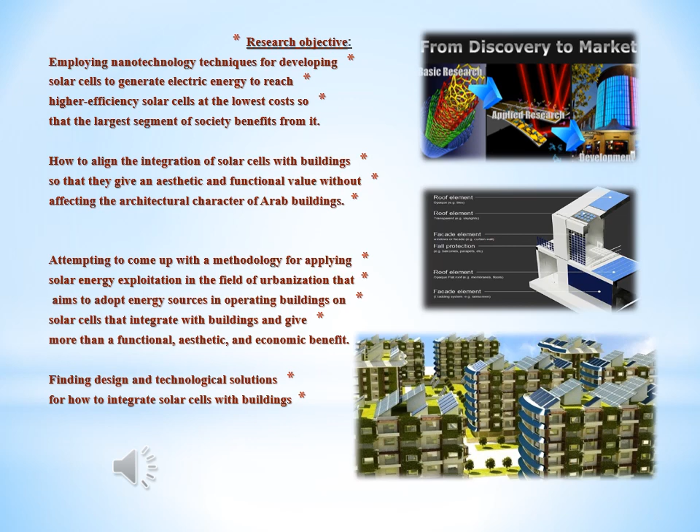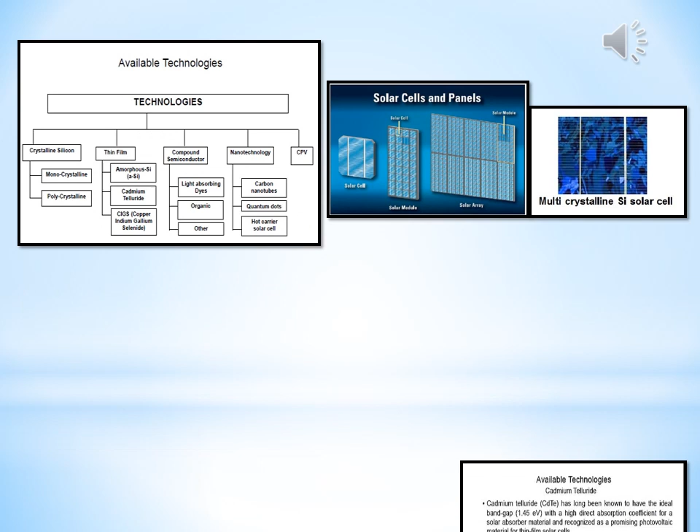This slide shows the different available technologies of photovoltaic cells: crystalline silicon, monocrystalline silicon, polycrystalline silicon, thin film, amorphous silicon, cadmium telluride, copper indium gallium compound semiconductor, light absorbing or organic photovoltaic, and nanotechnology CPV.

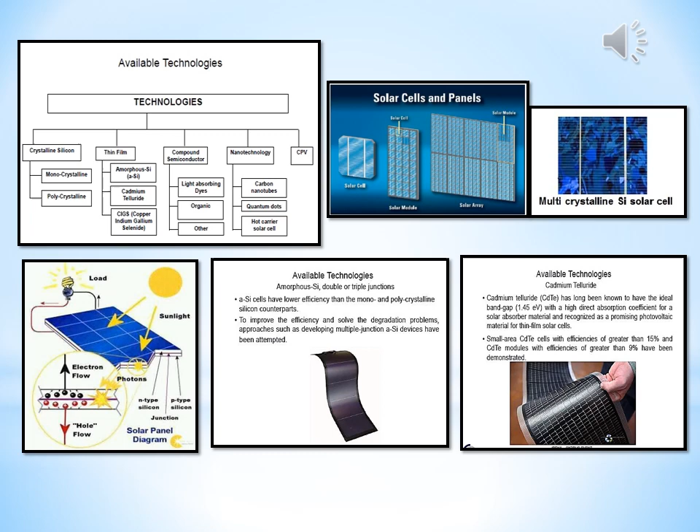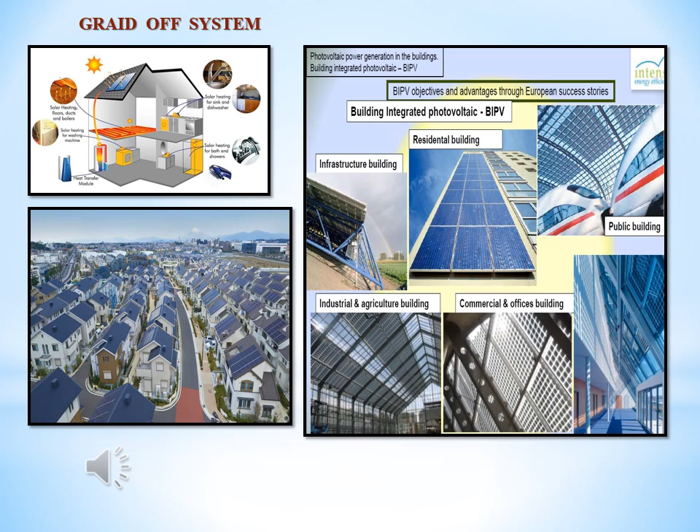This slide shows the grid off system of integrated photovoltaic cells. Photovoltaic power generation in building integrated photovoltaic, BIPV: residential building, infrastructure building, industrial agriculture building, commercial and office building, and public building.

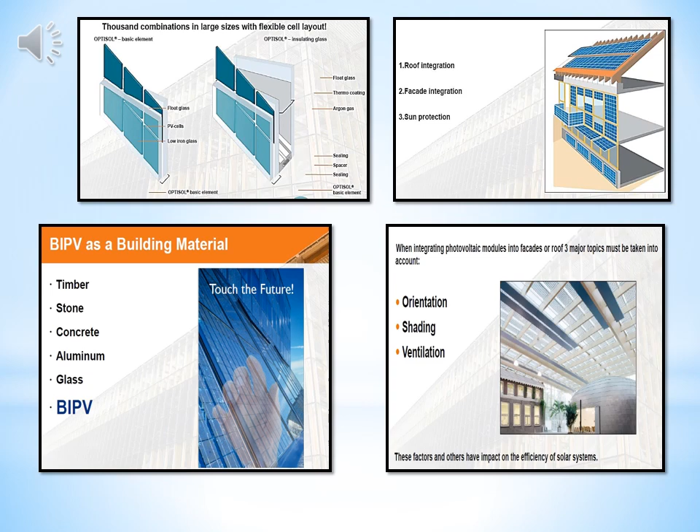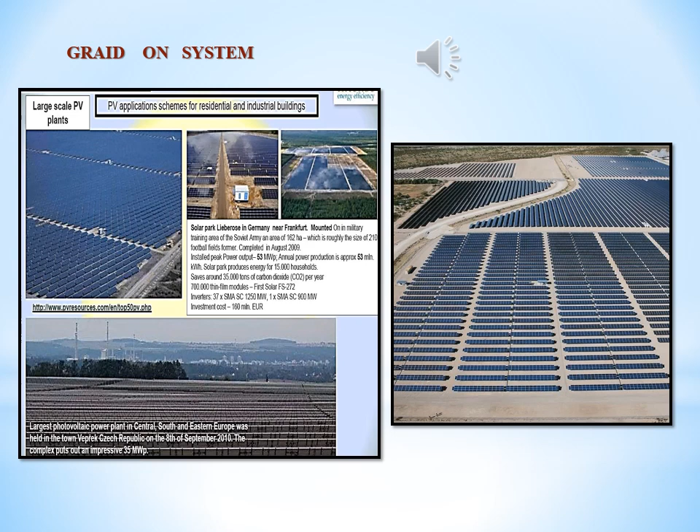This slide shows how architecture design can integrate photovoltaic cells with buildings. This process of designing the integrated energy of the building must include the following activities beside the traditional architecture design and construction stage.

Integrated design of the building through content and cooperation planned by the building and owner design, with a clear goal setting for the building design and project costs.

Simulating the building energy performance through an electronic system to help the designer take better decisions about the properties and components of the building's outer shell.

Learning about the efficiency of using solar energy technology in the building gives option and opportunity for the designer to design an energy efficiency strategy for the building, understanding the general climate of the project site to help design the climate environment of the building to be responsive to the general climate, helping to realize energy consumption reduction in the building.

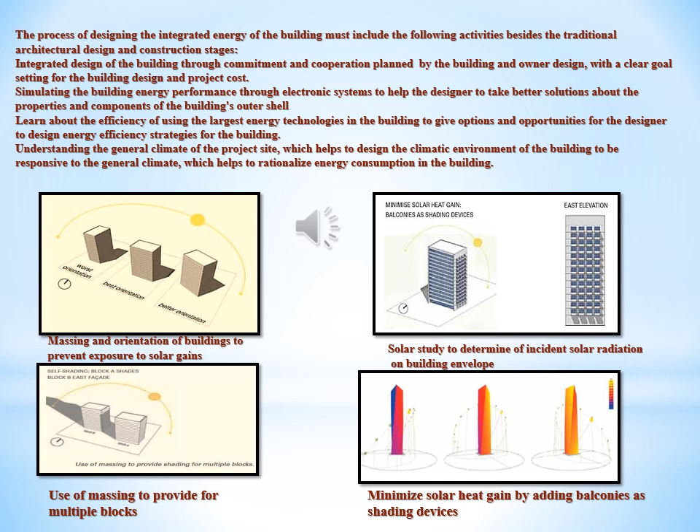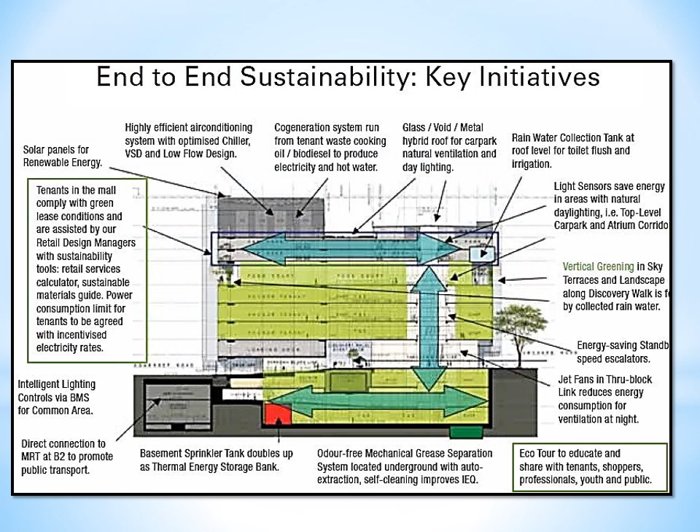Case study: building orientation is optimized with minimal direct west facing facade, 15% to reduce solar heat gain. Computational fluid dynamic analysis is carried out to optimize natural wind flow through the development. Sun shading devices are provided on the northwest to southwest facing openings. Approximately 60% of the roof area is covered with a combination of PV panels and an extensive green roof system.

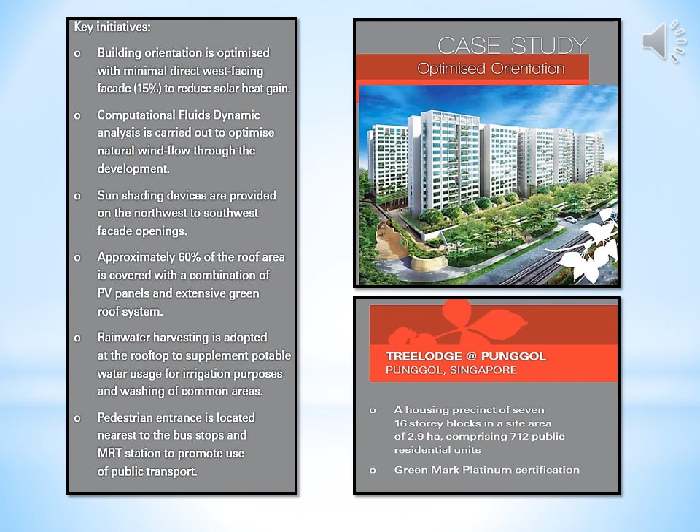High performance building envelope designed with a host of environmentally friendly features, including high energy efficiency cooling plant, innovative heat pipe technology to reduce the cooling load of the air conditioning system, and recycling of condensate to save water, thereby reducing the carbon footprint of the building. Energy efficient fluorescent lights with electronic ballasts are installed in the building, and motion sensors connected to the lighting in the toilets are used to reduce consumption.

The GATE project solar photovoltaic building integrated photovoltaic are used to replace conventional building material in part of the building envelope such as the roof, skylight, or facades. The advantage of integrated photovoltaic over more common non-integrated systems is that initial cost can be offset by reducing the amount spent on building materials and labor that would namely be used to construct the part of the building that the PV modules replace.

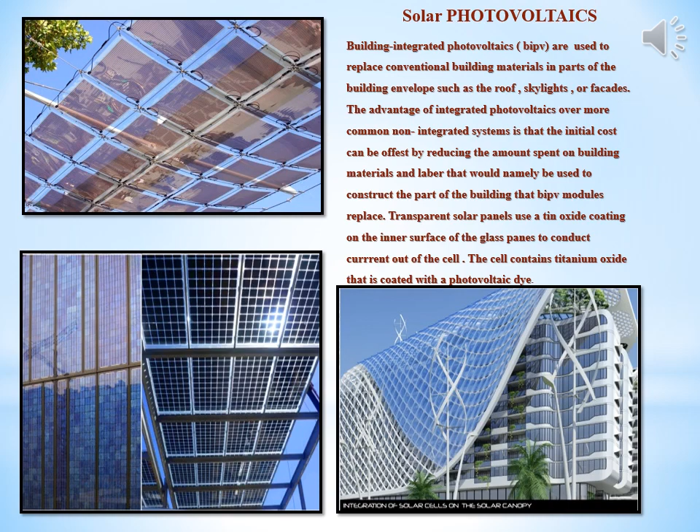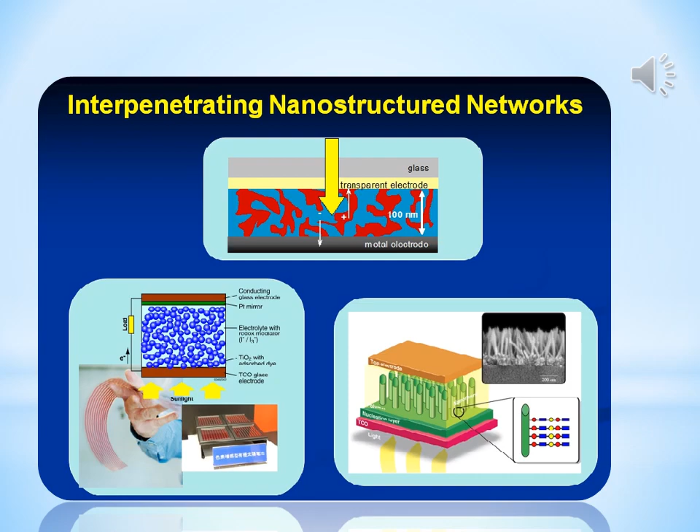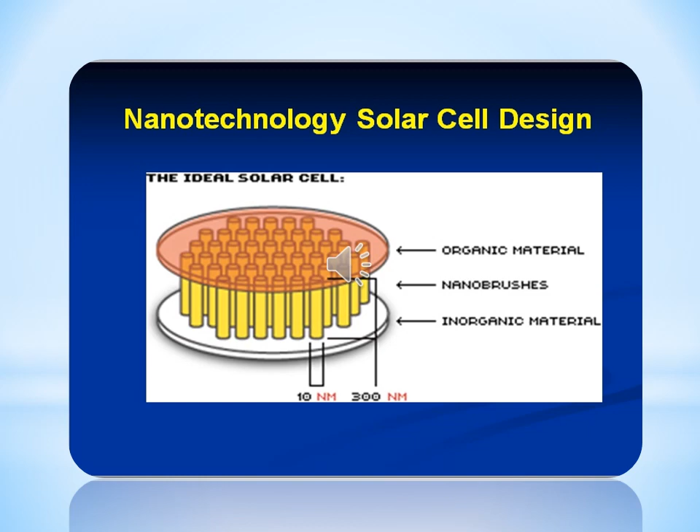Organic photovoltaics convert sunlight into electrical power. Nanotechnology solar cell design, by synthesized solar cell. Future generation printable cell, solution processable semiconductor, organic cell nanostructure cell.

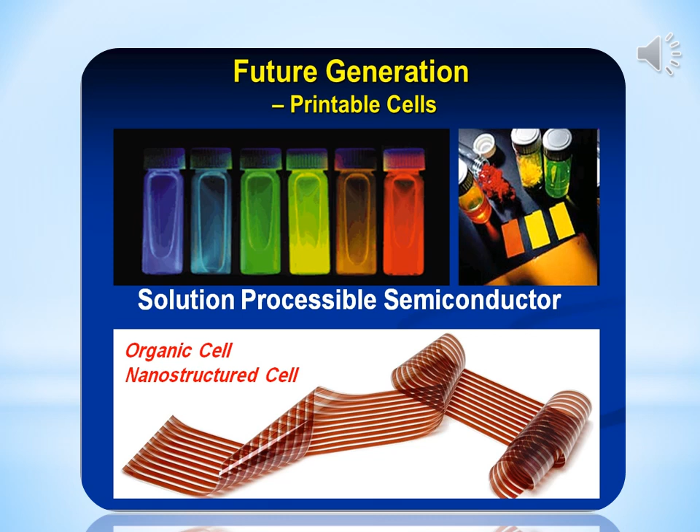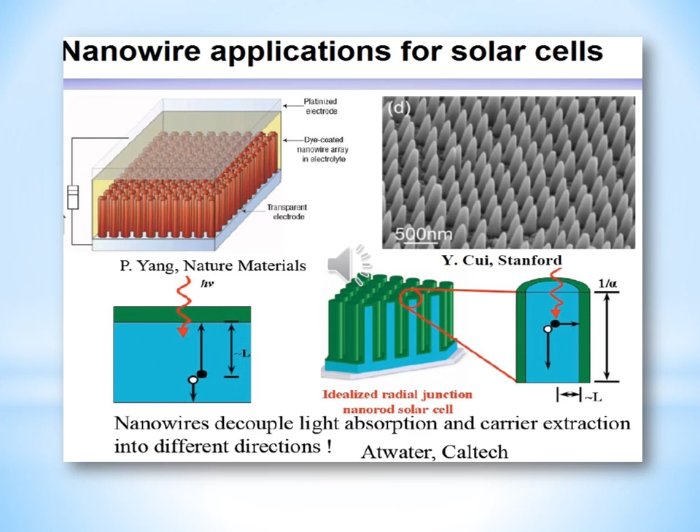It was also possible to produce organic cells from natural materials. One of their advantages is to reduce their production costs, even if they are less efficient than silicon cells. It was also possible to produce plastic photovoltaic cells in the form of a soft roll, and they can be placed on large areas such as the roofs of buildings.

It was also possible to reach types of cells that can be merged with the glass interface curtain walls in various colors and shapes, becoming an important structural element of the building. Also, through nanotechnology techniques, it is possible to develop photovoltaic cells through green chemistry and change the properties of the materials that make photovoltaics, raising their efficiency to match that of silicon cells.

The issue of energy and its relationship to building, known as the sustainability of building discussed in this research, is not considered a manifestation of luxury, but a fundamental issue related to the economics of countries and their human development. Energy is an urgent issue at present, as all countries try to provide energy sufficient to meet the multiple needs of their population. The more the population increases, the more the need for energy, as energy underlies all human activities and is the main nerve of contemporary life.